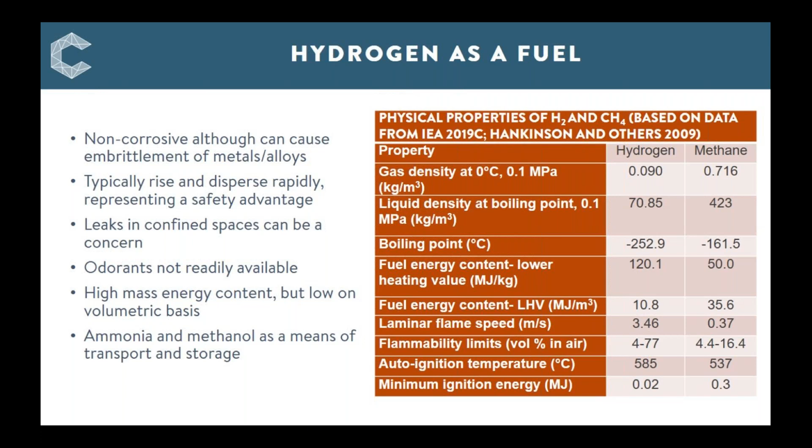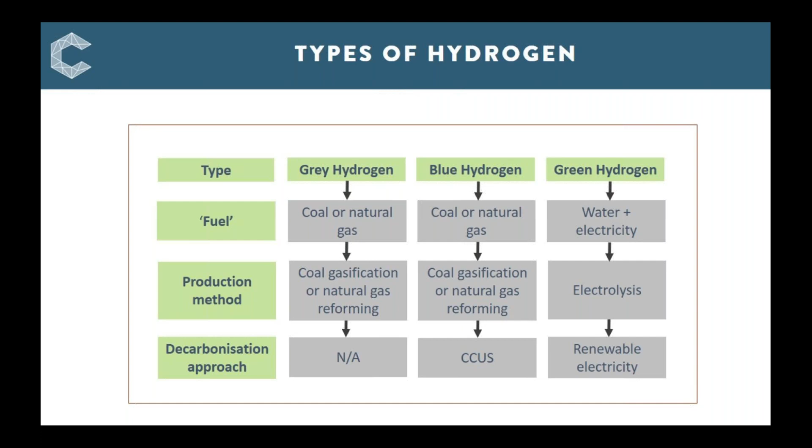A useful classification for hydrogen is the colour type classification scheme. Grey hydrogen is where the hydrogen is produced typically by steam methane reforming of natural gas or by gasification of coal. Carbon abatement is not used, so CO2 emissions for this type of hydrogen are relatively high, particularly with coal. Blue hydrogen is produced as per grey hydrogen as just described, but now including carbon abatement, typically in the form of carbon capture, utilisation and storage. And finally, green hydrogen, which is produced through the electrolysis of water using electricity generated from renewable sources. A comparison of these methods in terms of emissions and costs is presented later in the presentation.

So having looked at hydrogen as a fuel, this next section will look at the current markets for hydrogen and how this might develop through to 2050.

There's a growing interest in the potential of hydrogen to become a clean energy carrier in the move towards limiting global temperature rise. The primary reason for this is its ability to support the reduction of greenhouse gas emissions and to limit the point of use release of air pollutants.

Analysis by the Intergovernmental Panel on Climate Change, for example, shows that pathways to limit global warming to 1.5 degrees C requires combinations of new and existing technologies and practices, including hydrogen.

Hydrogen is an energy carrier rather than an energy source, which means that its potential role has some similarities with electricity. The key difference, however, between hydrogen and electricity is that hydrogen is a chemical energy carrier, which means that it can be transported and stored in ways similar to conventional fuels.

It can be burned to produce high-temperature exhaust gases for power production and heating, and it can be used in largely existing transportation and utilization infrastructure, allowing the adoption of business models developed previously for conventional fuels.

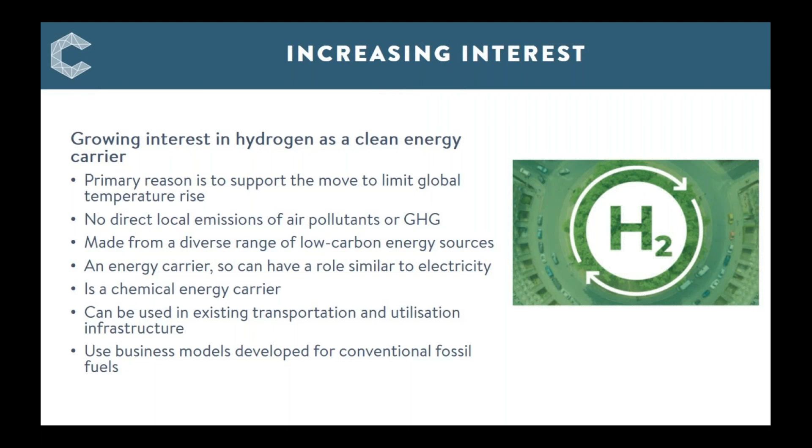Looking at the current uses of hydrogen, it is supplied almost entirely from fossil fuels, with coal accounting for around 27% of the hydrogen demand, natural gas accounting for over 70% of the hydrogen demand, and electricity as an input from electrolysis accounting for less than 1% of the hydrogen demand, with fossil fuels still indirectly accounting for the majority of this, due to the electricity for electrolysis being largely produced from fossil fuels in the countries where the hydrogen is produced.

In energy terms, the total annual hydrogen demand worldwide is around 330 million tonnes of oil equivalent, equating to 70 to 73 million tonnes of hydrogen per year. The hydrogen is produced in dedicated facilities, primarily local to the point of use, and its main uses are around 38 megatonnes of hydrogen per year for upgrading petroleum products in refinery applications, and around 31 megatonnes of hydrogen per year as a feedstock for ammonia production.

In addition to this dedicated hydrogen demand, there is a further 45 to 48 megatonnes of hydrogen produced as byproducts from other processes, with the main users for this being 12 megatonnes of hydrogen per year for the manufacture of methanol, 4 megatonnes of hydrogen per year in the manufacture of steel, and 26 megatonnes of hydrogen per year for other applications, such as synthesis gas for fuel or feedstock and process heating.

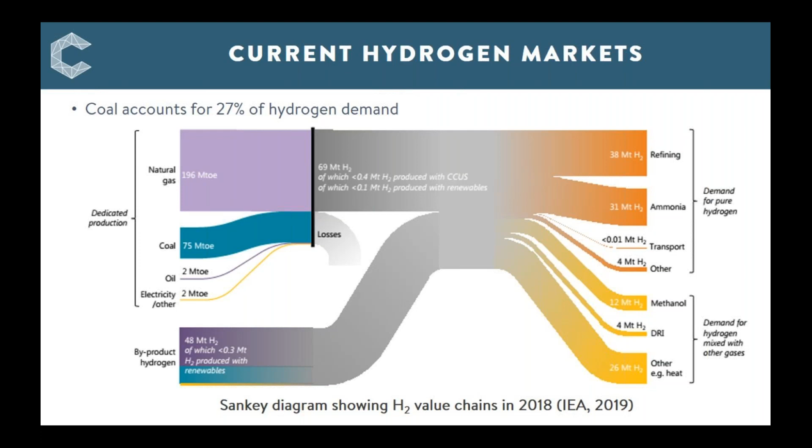A number of assessments of the future demand for hydrogen have been carried out. In all of these, hydrogen is seen as a necessary feature of the energy transformation. It could play an important role as part of a broader strategy, with applications which fall into two main categories. Firstly, applications where clean hydrogen is the only viable decarbonisation alternative, or where it has a proven advantage over all competing solutions. This would include current feedstocks used in the chemical industries, primarily for ammonia and methanol, feedstock for use in iron and primary steelmaking industries, and fuel for long-distance shipping.

Secondly, in applications where hydrogen could become the preferred decarbonisation solution in the future. This would include fuel for long-distance, road-based haulage applications, where the main competitor would be direct electrification with batteries, heating buildings to complement electrification, and storage and buffering use in interconnected power systems.

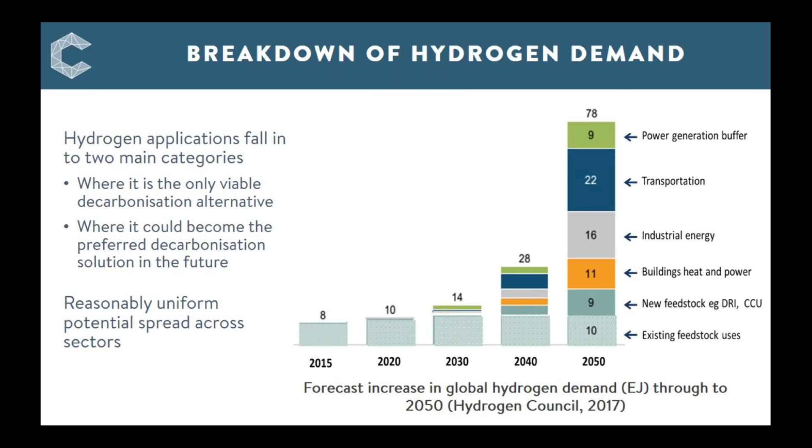The breakdown of the forecast use of hydrogen demand in 2050 is shown here, with a total demand of up to 78 exajoules, or around 650 megatonnes of hydrogen per year. So in this future, hydrogen will be used primarily for industrial feedstock and energy, together with transportation, heating, and powering buildings, together with power generation usage, including hydrogen buffering. The spread of hydrogen usage across these sectors is reasonably uniform, with significant quantities of hydrogen used in each.

So looking at each of these sectors in a little more detail. Transportation represents the single largest potential market for hydrogen at around 185 megatonnes of hydrogen per year by 2050, representing nearly 30% of the total hydrogen.

The primary use of this hydrogen is in transport and is expected to be in fuel cell electric vehicles, where the main competition will be battery electric vehicles, so-called BEVs. So both BEVs and fuel cell electric vehicles have no point of use emissions and thus offer the potential to significantly reduce local air pollution, especially in cities.

There should be an advantage for fuel cell electric vehicle based transportation options for the large-scale segments which require long range and typically heavy loads, with the highest uptake likely to be in large cars, trucks and buses, with more than 80% of hydrogen demand for mobility likely to be in these applications.

In terms of technology readiness, fuel cell electric vehicles are commercially available now or will become available in the next 5 years. There is also the need to further reduce the costs and build up refueling station networks in parallel if more automotive manufacturers are to be attracted to the fuel cell EV market.

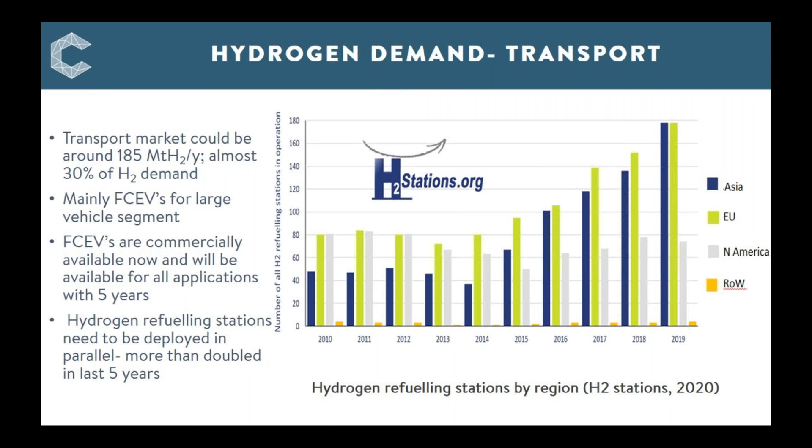In terms of industry, the industrial sector, comprising emerging and existing feedstock applications and industrial energy use, is similar in size to the transport sector, comprising around 190 megatons of hydrogen per year by 2050.

The methanol to olefins and methanol to aromatics demand segments are set to grow the quickest at around 4.1% per year to 2030, with nearly all of this growth coming from China.

For steel, the Hydrogen Council estimates that about 10% of virgin steel could be produced through the direct reduction of iron process by 2050. If all DRI processors use hydrogen as a reducing agent, this would lead to a hydrogen demand of about 11 megatons of hydrogen per year, although a more realistic scenario could be that around half of the DRI processors will use hydrogen.

For industrial process heat and space heating, hydrogen could provide 23% of high-grade heat, 8% of medium-grade heat, and 4% of low-grade heat and power, according to the Hydrogen Council.

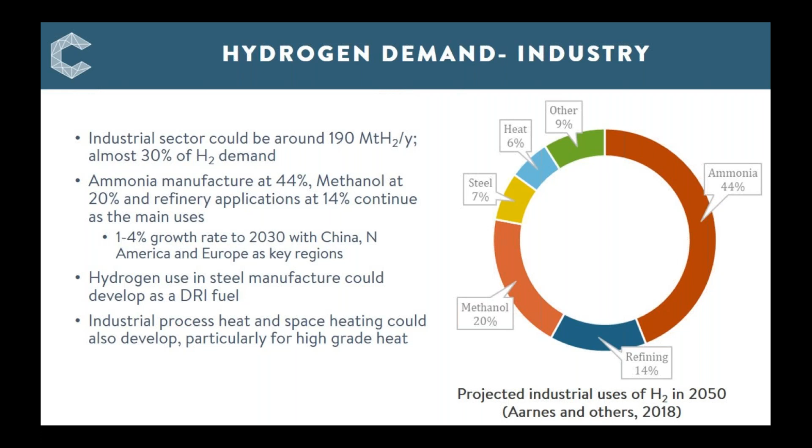Heating and power for buildings could account for around 92 megatons of hydrogen by 2050. Countries that are likely to lead in this market are Australia, Canada, the Netherlands, South Korea, UK and USA. These countries predominantly use gas for heating buildings and have infrastructure that can be adapted to hydrogen distribution and storage.

Hydrogen has the advantage compared with electricity in that it can be stored for long periods, which is relevant as heating demand is highly seasonal. Electrification of heating using heat pumps would create a strong seasonal variation in the demand for electrical power, which would require additional renewable capacity to cope with this winter demand.

In addition, converting to hydrogen heating may be more convenient than full electrification, as no additional space or rewiring is needed to install new equipment, and no adjustments to heating patterns need to be made. This could be an advantage for the use of hydrogen for space heating, particularly in terms of customer acceptance.

In addition, gas transported through gas infrastructure provides a flexible, storable form of energy. As current transport grids often consist of parallel pipelines, part of existing pipelines could be used for hydrogen transmission in future systems. Whether existing natural gas transmission infrastructure can be repurposed to carry 100% hydrogen depends on the type of steel and the pipeline pressure.

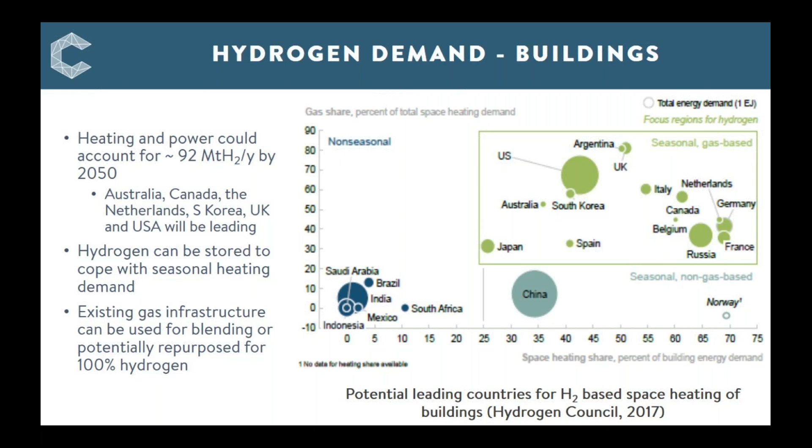Hydrogen by 2050 could provide around 1,500 terawatt-hours of dispatchable power produced from hydrogen, representing 75 megatons of hydrogen per year, with some 500 terawatt-hours of excess solar and wind electricity converted to hydrogen, representing 30 megatons of hydrogen per year.

According to the IEA Sustainable Development Scenario, limiting global warming to 2 degrees C or below requires more than half of global power generation to be based on wind and solar power by 2050. A key challenge to achieve this will be matching supply and demand, as more power is generated from intermittent sources.

Hydrogen can contribute to this transition as an enabler in renewable power storage, distribution and buffering, as well as a complementary source of clean power generation. The amount of storage required increases with the share of variable renewable energy, with several studies showing that the increase becomes significant as the penetration level exceeds around 60%.

Hydrogen could therefore be a medium for storing electricity using the power-to-gas approach, although this will be predominantly a green hydrogen market, with hydrogen from electricity later converted back. Having said this, there is still an opportunity for coal to play a role, where the renewable hydrogen is reacted with CO2 to produce substitute natural gas and methanol, with coal power plant exhaust being a ready source of the CO2 needed to do this.

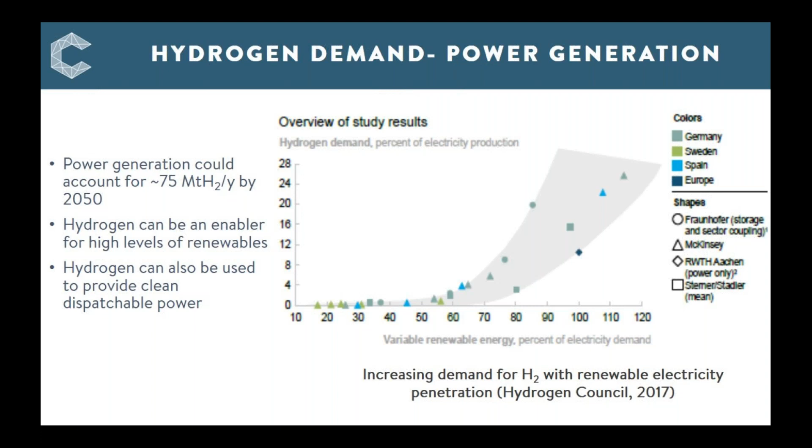Turning now to the topic of producing the hydrogen to fuel these markets.

Hydrogen production from coal using gasification is a well-established technology used for many decades by the chemical and fertilizer industries for the production of ammonia, particularly in China. In the gasification process, a hydrocarbon-rich feedstock, such as coal, is heated at high temperatures to produce a syngas rich in hydrogen, carbon monoxide and carbon dioxide. The syngas can then be upgraded by converting this carbon monoxide to carbon dioxide and more hydrogen using the water-gas shift reaction. The CO2 can then be separated using relatively mature physical absorption technologies such as Selexol and Rectisol, which means that coal gasification can be a low-carbon hydrogen production technology. The process can produce a stream of hydrogen of around 99.8% purity with a final pressure swing absorption step.

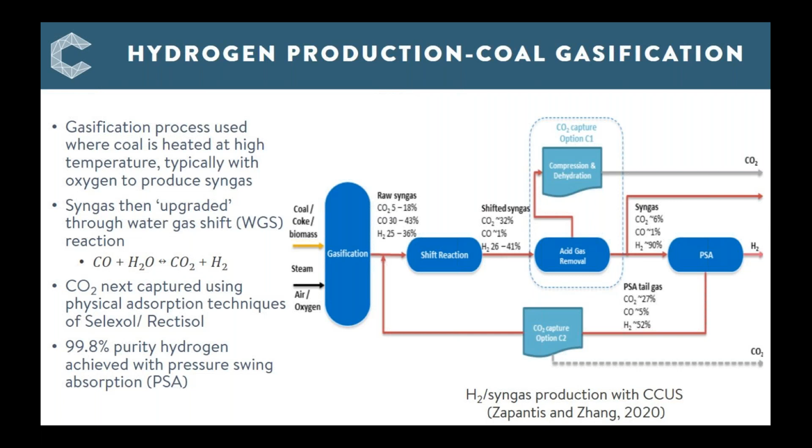Globally, around 130 coal gasification plants are in operation, with more than 80% of them in China. In terms of gasification with carbon capture, there are currently 3 facilities producing hydrogen from coal, coke, and petroleum coke at scale, with a combined capacity of around 0.6 megatons of hydrogen per year, namely the Great Plains and Coffeyville plants in the USA and Sinopec Qilu in China. The Great Plains plant alone produces some 1,300 tons per day of syngas, demonstrating that large-scale production of low-emissions hydrogen using carbon capture can already be technically and commercially feasible.

Additionally important is the Latrobe Valley gasification pilot plant in Australia, as part of the hydrogen energy supply chain project, that will see hydrogen produced in Australia shipped to the Kobe plant in Japan for utilisation. Also interesting for the future is the Pouakai proposed project in New Zealand, which integrates a natural gas-fired supercritical CO2 power cycle, known as the Allam cycle, with an 8 Rivers steam methane reformer unit to produce hydrogen. So whilst this isn't a coal-based demonstration, the earlier net power Allam cycle demonstration in the US shows that coal-based operations are entirely feasible.

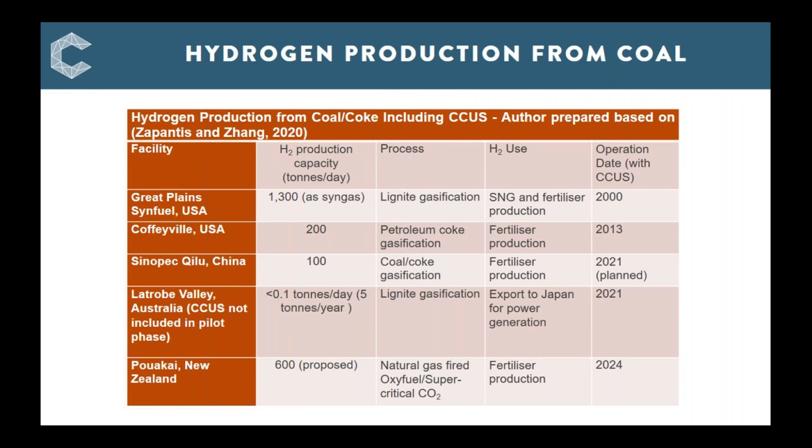The largest clean hydrogen plant globally is the Great Plains Synfuel plant in North Dakota, USA, producing 1,300 tons per day of hydrogen from the gasification of lignite. The plant produces synthetic natural gas and anhydrous ammonia using 14 Lurgi Mark IV oxygen-blown gasifiers. The total cost for the design and construction of the plant was around $2 billion US, which was designed with 2 product trains to improve plant availability, so that the plant can still operate at 50% capacity if one of the product trains is out of operation.

The plant began operation in 1984, using 5 to 6 megatons of coal to produce around 1.5 billion cubic meters of substitute natural gas annually. During the plant's life, it has been modified to improve productivity, efficiency, and reduce environmental impacts.

In addition to the plant upgrades to improve efficiency, the plant was also diversified to produce a wide range of secondary products. Ammonia scrubbers were added to the boilers to reduce sulfur emissions and to enable the production of ammonium sulfate. And in the 1990s, an anhydrous ammonia synthesis unit was added to produce anhydrous ammonia for fertilizer manufacture.

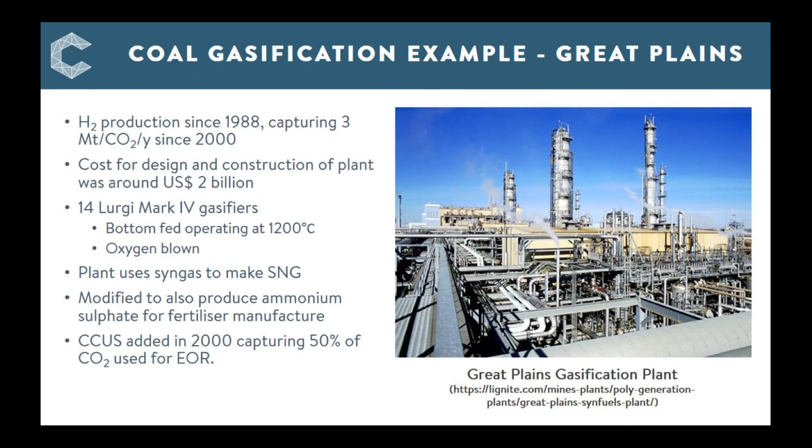Second example is the hydrogen energy supply chain project, which is being developed in Victoria State, Australia, with the support of Japan. The project aims to develop the demonstration of technologies for the production, storage, and transportation of clean hydrogen from lignite fuel in the Latrobe Valley, and to establish a supply chain through to utilization in Japan.

The pilot phase encompasses a gasification plant in Latrobe Valley and a liquefaction facility at the Port of Hastings. The 500 million Australian dollar project is supported by the Japanese government and Japanese industry, together with the Australian and Victorian governments, which have each contributed 50 million Australian dollars in funding.

Motivation for the project from the Australian side of the consortium is the declining domestic use of lignite, leaving these deposits as potentially stranded resources, together with interest in low-cost generation of hydrogen.

CCUS is not included in the initial pilot phase of the project due to the relatively small amount of CO2 produced during the pilot phase, with carbon offsets therefore purchased for the CO2 emitted in this phase. It is recognised, however, that for the subsequent commercial phase, CCUS will be needed, with the captured CO2 stored in cooperation with the Carbon Net Storage Project.

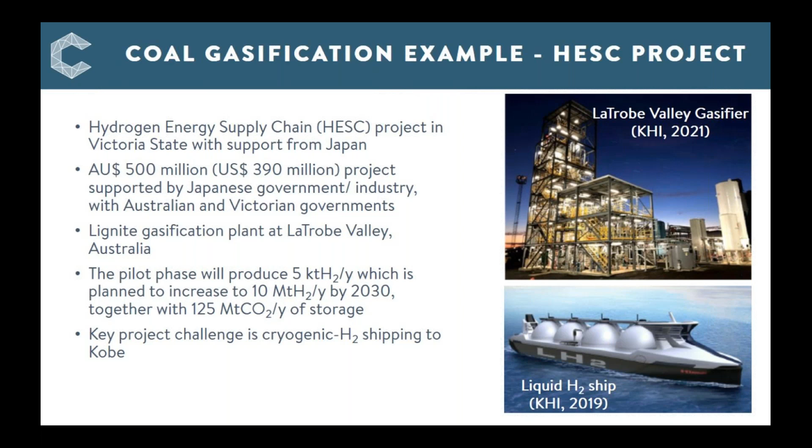Having focused on hydrogen production from coal, this next section of the presentation looks at how the cost and emissions compare with the other forms of hydrogen production.

A number of analyses have been carried out to assess the cost of hydrogen production. Notable among these are IEA, ARENA, Committee on Climate Change, Hydrogen Council, CSIRO, and US DOE. In these studies, hydrogen costs vary significantly as a function of the production technology used, together with additional factors including local factors due to geographic regional considerations, fuel prices, renewable electricity price, capacity and load factors, learning rates for both CCUS and water electrolysis systems, and the carbon tax charged for residual CO2 emissions. This means that direct comparisons are difficult to make due to the varying assumptions.

However, in general, blue hydrogen production routes based on coal gasification with CCUS and natural gas SMR with CCUS are lower cost than green hydrogen based on water electrolysis, typically by a factor of around 3.

This would indicate that with a large existing unabated fleet of gas and coal-based hydrogen production, the transition to large-scale, low-emissions hydrogen will require significant deployment of CCUS plants. Given the economic advantage of coal gasification and natural gas reforming with CCUS, it is likely that these will continue to be the lowest cost source of large-scale hydrogen in the near and medium term.

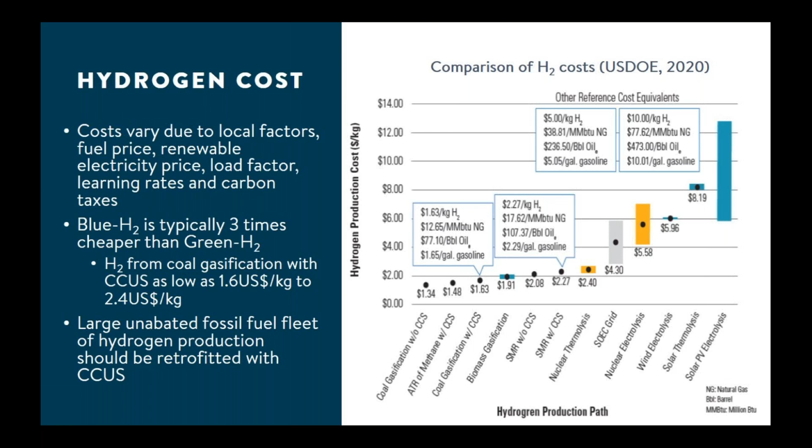In terms of the breakdown of the cost of hydrogen production from coal, in the case of China, capital expenditure and operating costs requirements account for around 80 to 85% of the cost, with fuel accounting for the remaining 15 to 20%. This reflects the relative complexity of the coal gasification-based approach compared with SMR and electrolysis.

The addition of the CCUS system contributes to around a 5% increase in CapEx, with the largest cost addition being around 130% increase in OpEx.

Analysis by the Committee for Climate Change shows that for a new build case in the UK, gasification plant would cost around £70 per megawatt hour, including the cost of CCUS. Future savings from economies of scale could reduce this, lowering the cost of future coal gasification with CCUS by around 10 to 15%, to closer to £60 per megawatt hour by 2050.

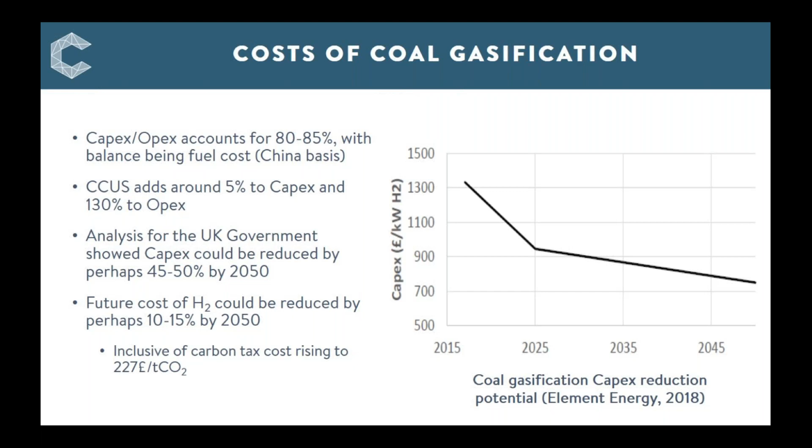In regions of the world with access to relatively low-cost renewable electricity based on high wind or solar incidence, green hydrogen produced using water electrolysis could in time become a competitor with blue hydrogen from coal or natural gas. Potentially promising areas are Patagonia, New Zealand, Northern Africa, the Middle East, Mongolia, most of Australia, and parts of China and the USA.

As a result, the cost of hydrogen from fossil fuels increases over time due to the assumed increase in CO2 tax cost, from $50 per tonne of CO2 in 2030 through to $200 per tonne in 2050, which is not offset by any reduction through technology development or learning by doing. But as I've shown in the last slide, this is very unlikely to be the case.

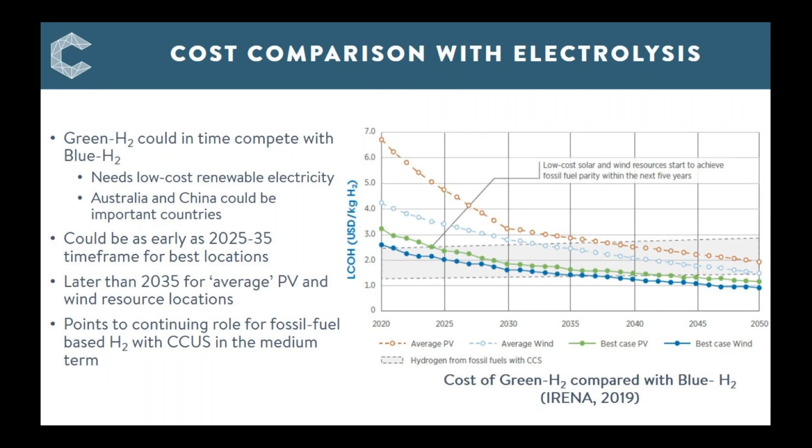As electrolyzer operating hours increase, the impact of CapEx costs on the levelized cost of hydrogen reduces, and the impact of the electricity cost element becomes increasingly important. Hence, the availability of low-cost renewable electricity is needed to ensure electrolysers can operate at relatively high full load hours. But if surplus electricity is only available on an occasional basis, it is unlikely to be commercially viable to rely on this for hydrogen production alone.

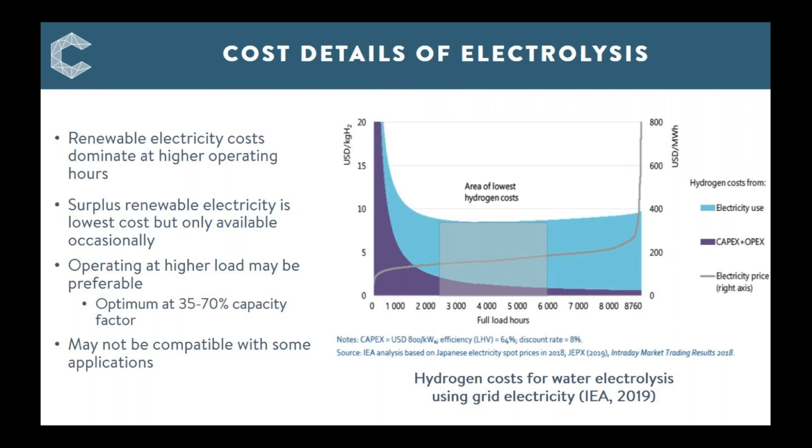However, when CCUS is added, this carbon intensity can be reduced to below 3 kilograms of CO2 per kilogram of hydrogen, as shown, based on 90% CO2 capture. As noted earlier, there is the option to co-fire coal with biomass and/or waste, which can reduce the carbon intensity, or move to higher capture efficiency technologies.

In comparison, water electrolysis using renewable electricity alone is close to zero CO2, but where grid electricity is used, which contains a portion of fossil fuel-based power generation, emissions can be around 25 kilograms of CO2 per kilogram of hydrogen, i.e. higher than unabated coal.

The outcome of this is that in terms of moving towards net zero emissions, the impact of water electrolysis could be detrimental unless the water electrolysis process is used at low capacity factor to use mainly renewable electricity, or until renewables penetration of a region's energy mix increases significantly, such that the carbon intensity of the grid electricity is reduced to a very low level.

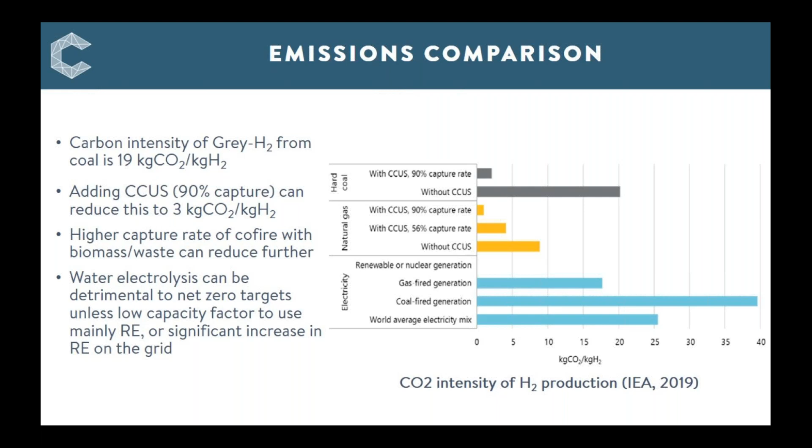So looking finally at the area of hydrogen strategies and the necessary policies to support their uptake. The number of countries producing hydrogen strategies and the scale of the ambitions contained in them is increasing. Countries that have announced national hydrogen strategies or roadmaps include Australia, Austria, Belgium, the EU generally, France, Germany, Italy, Japan, Korea, the Netherlands, Norway and the UK.

Looking at the first of these, Australia as an example, they published a national hydrogen strategy in November 2019, with the Australian government committing 370 million Australian dollars to advancing Australia's hydrogen industry since the release of this strategy. Australia also published a technical roadmap for hydrogen, produced by the Commonwealth Scientific and Industrial Research Organisation.

The IEA has identified 5 policy actions through to 2030, which should be pursued to increase the uptake of hydrogen in the energy transition. In general, these policy signals are needed to provide key stakeholders with certainty that there will be a future market for hydrogen. Climate policies in particular will be important, with potential actions including the establishment of high-level instruments such as emissions reduction targets or commitments to deploy certain energy resources or carbon pricing systems.

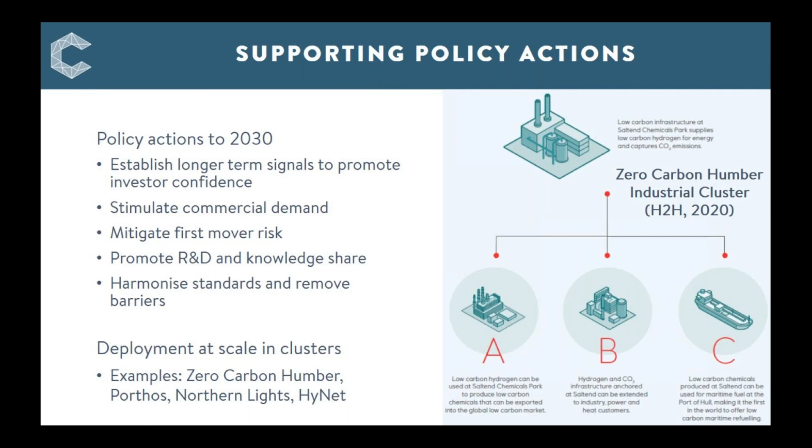A priority should be the deployment of hydrogen technologies at scale. This is to reduce the cost of fossil fuel-based hydrogen production with CCUS by learning by doing and by building confidence in the technology.

So finally, wrapping up with some conclusions. The total global hydrogen demand in 2018 was around 115 megatons of hydrogen per year, which was produced local to the point of use and almost entirely from fossil fuels.

This was used primarily as feedstock in the refinery and chemical industries, with coal accounting for around 27% of the hydrogen supply. The global demand for hydrogen is forecast to increase to perhaps as high as 650 megatons of hydrogen per year, representing around 14% of the expected world total demand in 2050.

Hydrogen production from fossil fuels with CCUS is lower cost than green hydrogen based on water electrolysis, typically by a factor of around 3. Coal gasification with CCUS costs typically 1.6 to 2.4 US dollars per kilogram of hydrogen, with the lowest cost being that in China.

Learning by doing through large-scale commercial rollout, together with cost reduction through technology innovations, could reduce the cost by perhaps 10 to 15% by 2050.

In terms of emissions, the addition of CCUS at 90% capture rate can reduce the carbon intensity of this process to below 3 kilograms of CO2 per kilogram of hydrogen.